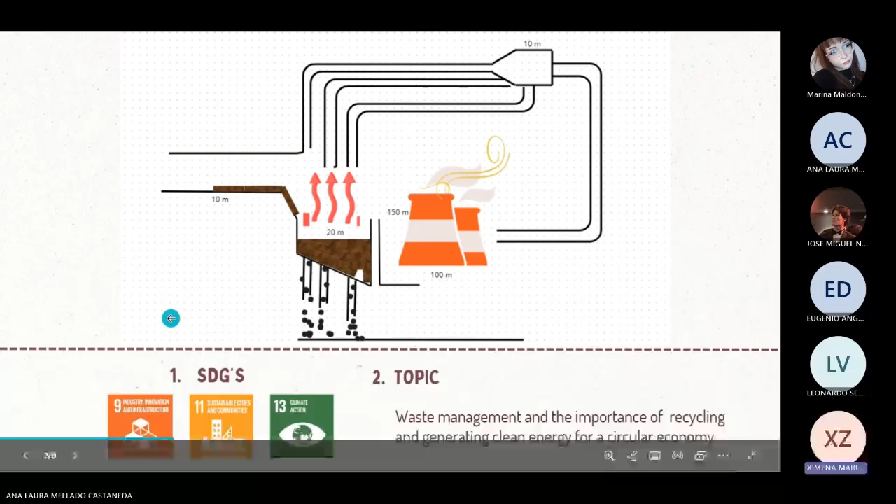The SDGs that the project will align to are SDGs number 9, 11, and 13. The topic mainly focuses on waste management, the importance of recycling, the generation of clean energy, and the implementation of a circular economy in the state of Nuevo León.

The issue the project deals with is the ineffective waste management that leads to several problems such as pollution, health issues, and climate change all across Nuevo León, especially in the metropolitan area. The justification for this project is that we want to address Nuevo León's critical waste crisis.

EcoCycle will try to replicate a waste-to-energy system that is already implemented in Singapore. This model cuts landfill use by over 90% and converts waste into clean energy. This proposal directly reduces pollution, improves public health, and combats climate change.

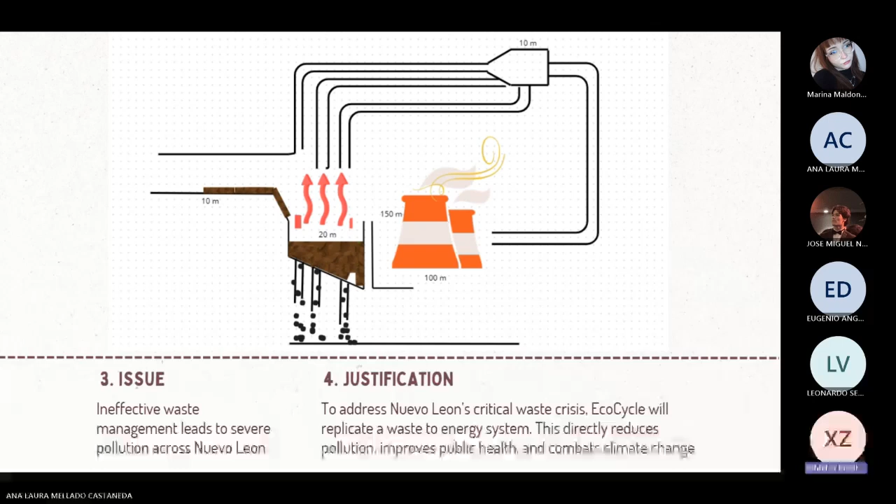The principal purpose of the plant is to reduce pollutants as much as possible, liberate more clean gases, and use the residues to make public constructions.

The description of this simulator is that the non-recyclable waste is sent to advanced incineration plants, where it is carried with conveyor belts and burned at very high temperatures to significantly reduce its volume and thus the amount of contamination produced. Then the gases are released through a filtration system, minimizing environmental impact.

The ashes are reused. In our version, we will include a digital reward system that gives citizens incentives for correctly separating their waste, and new educational institutions will show how this process works, promoted through community involvement.

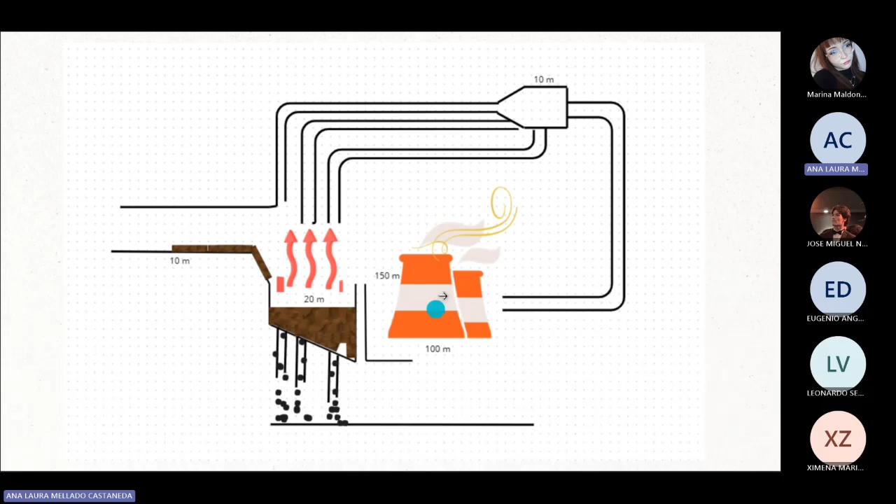The machine is made up of several key components: a shredder to break down materials, a trommel or rotary screen to separate them by size, a conveyor belt system for transport, a three-phase electric motor for power, and a PLC controller that automates the entire process. All of these are supported by a strong metal frame structure.

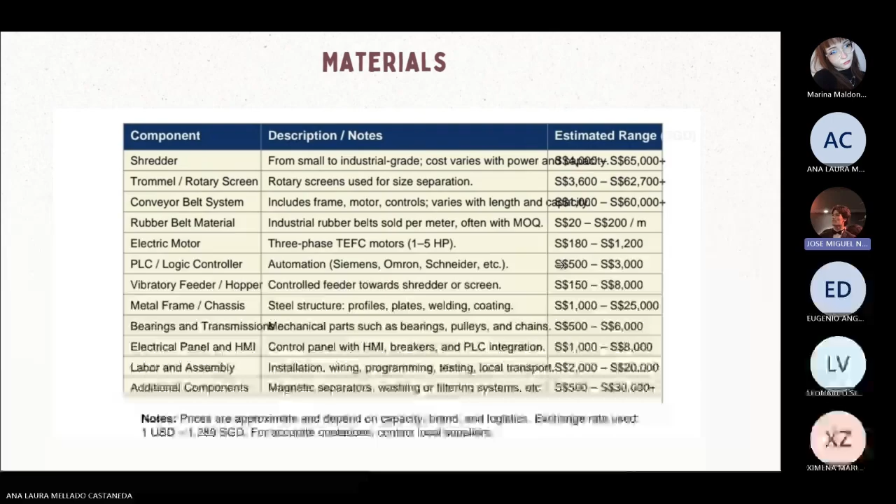Using SimPhat, the entire system can be simulated to study material flow, energy consumption, and efficiency. This allows engineers to optimize the design, lower costs, and predict failures before building the physical machine, making recycling systems more efficient and sustainable.

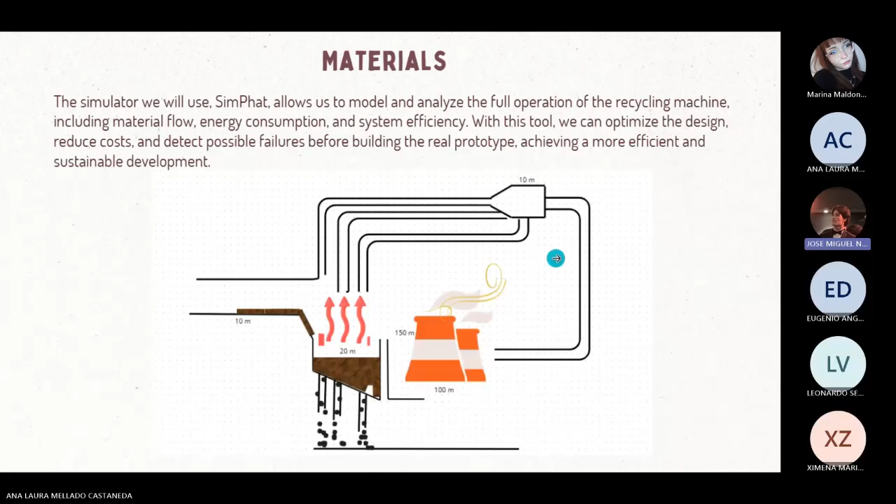To create the layout in the simulator, the following steps must be followed. First, it begins with the collection area, where trucks unload the waste at the transfer plant. Later, this area is connected to the recycling plant, and conveyor belts are added between the two to transfer materials from one zone to another, also including shredding machines.

Then it moves to the incineration area, where the polluting smoke produced is filtered to release clean air, while the ash is collected and later sent to an area where it can be used as a construction mix. Here, turbines, conveyor belts, and filters are added to complete the flow.

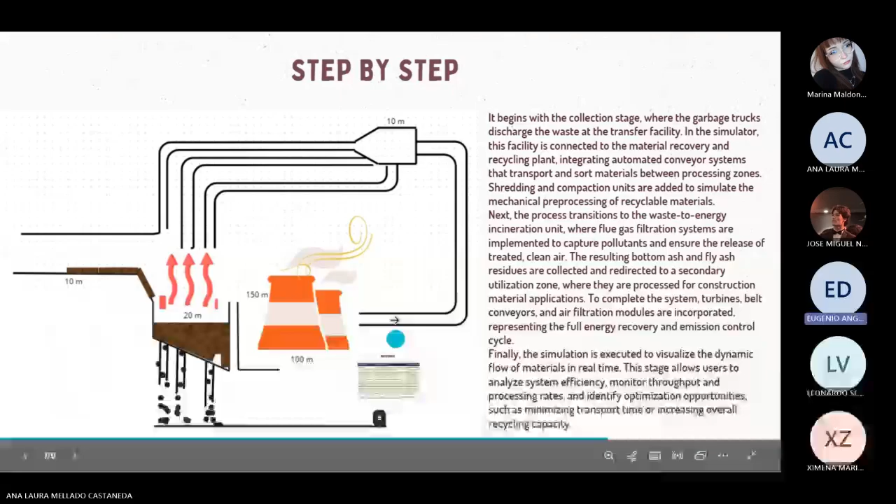Finally, the simulation is run to observe the movement of the waste in real time. Here, the efficiency of the design can be analyzed and possible improvements identified, such as reducing transport times or increasing recycling capacity.

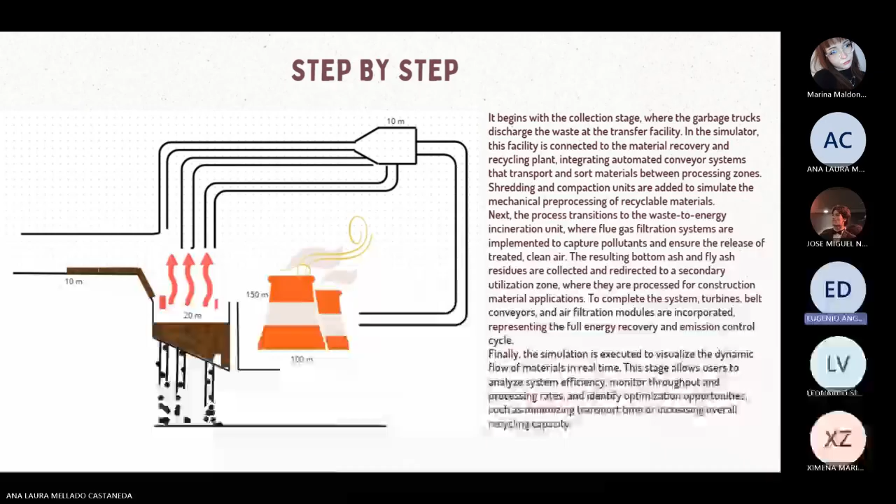Finally, we made an analysis of data and variables. For the analysis of data, we analyzed how much waste is produced, treated, and recycled in Nuevo León, and compared these numbers with Singapore's model to understand how waste-to-energy systems could improve the situation.

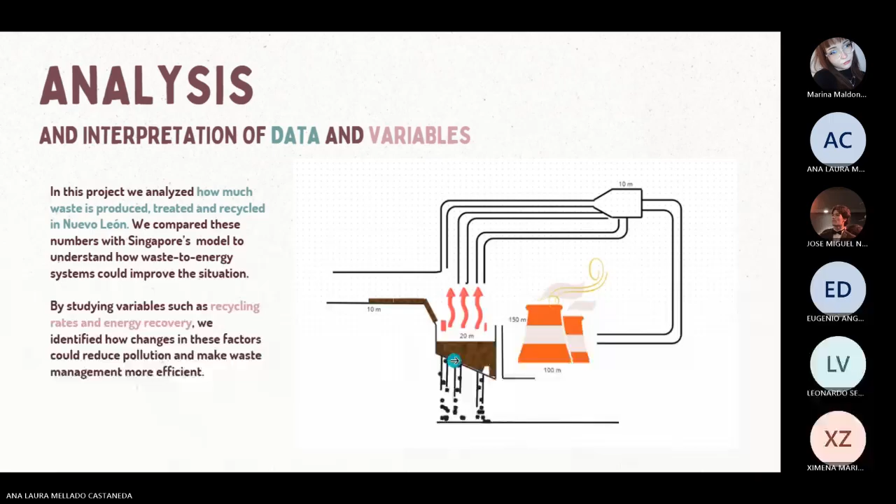For the analysis of variables, by studying factors such as recycling rates and energy recovery, we identified how changes in these factors could reduce pollution and make waste management more efficient. Thank you.